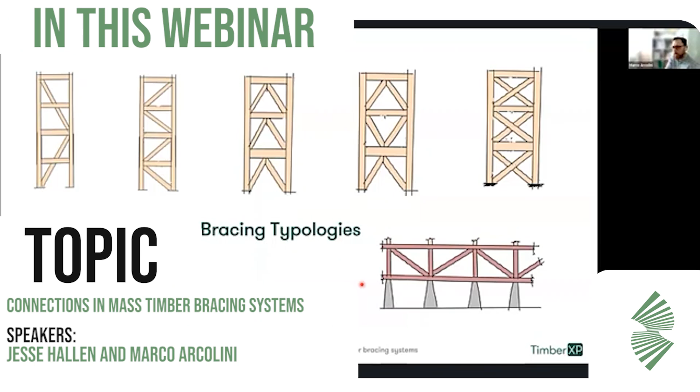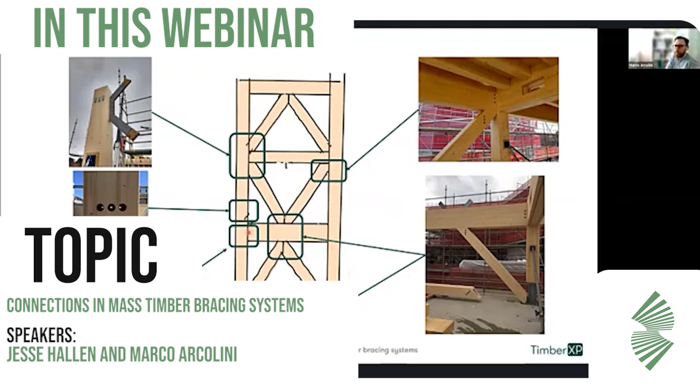Now we can step into the bracing typologies, each of which has its own pros and cons. However, we face issues from the durability and maintenance point of view. For instance, the way the building is stuck on top of the colonnade. For instance, we have the middle point in the beam where the diagonal intersects.

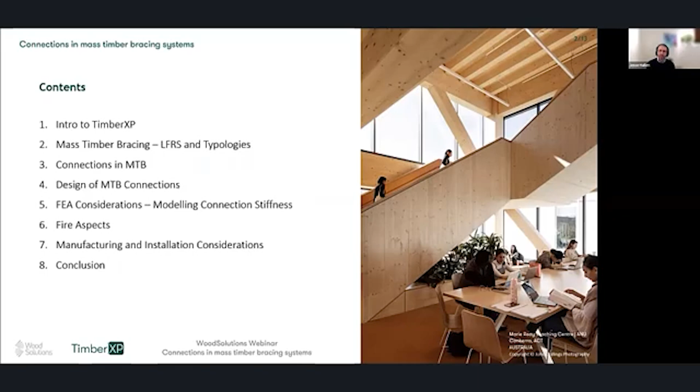So in terms of what we'll cover today, we'll start with a quick intro to our company. I'll then hand over to Marco, who is our principal engineer and bracing and connections guru. So he'll take us through some different mass timber bracing typologies. We'll look at connection details and some design considerations. We'll touch on structural analysis and specifically handling connection stiffness in a finite element model. And we'll close with some comments on holistic design, so considering aspects such as fire, manufacturing, and installation.

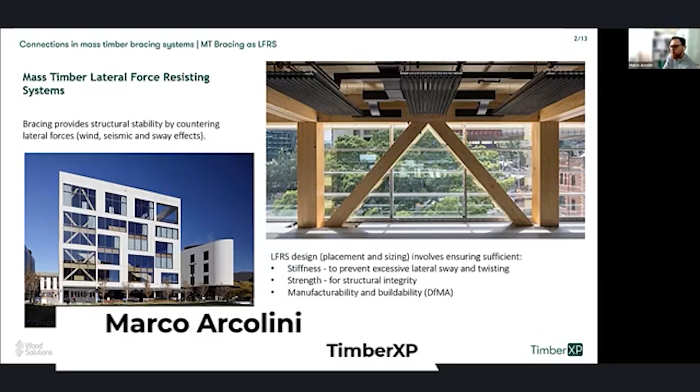Before I start presenting, we appreciate that not everyone in the audience comes from a structural engineering background, so we keep our discussion high level and avoid getting too technical. But let's get started. So bracing systems typically feature lateral force resisting systems that provide structural stability to our buildings. And these kinds of systems react to lateral forces such as wind and seismic.

The placement and sizing of the lateral force resisting system play a crucial role in ensuring stiffness, which is very important in order to prevent excessive lateral sway and twisting of your building, as well as providing the necessary strength for structural integrity. In addition to that, though, by properly designing bracing and connections in mass timber, we can enhance the design for manufacturing and assembly, which is the kind of DFMA approach that we know quite well. So making manufacturing and installation a very smooth and efficient process.

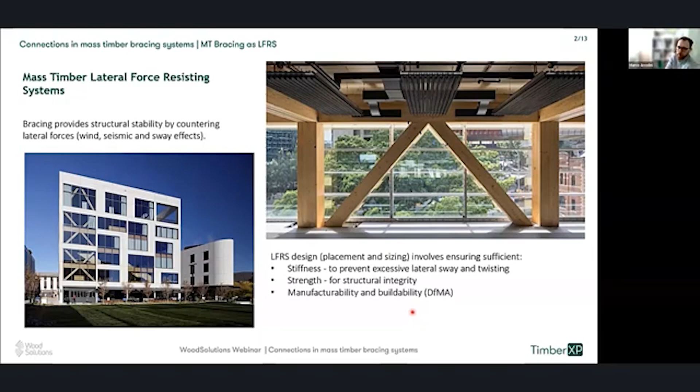But in order to achieve that point, it's crucial, in our opinion, to start from the beginning thinking about the way you want not only to design, but also physically manufacture and erect your building. In this case, the bracing system.

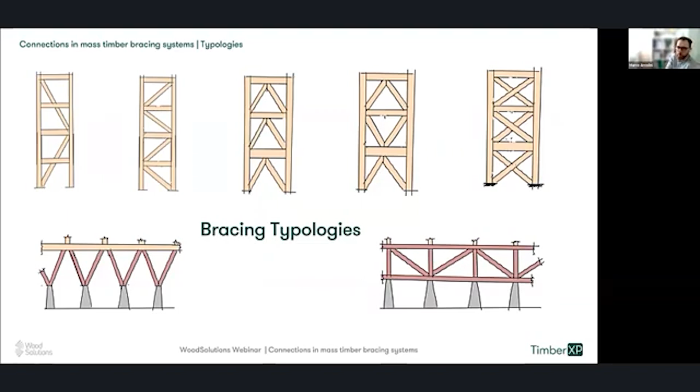Now we can step into the bracing typologies, each of which has its own pros and cons. It's very important because understanding these differences is key for you in order to properly select the bracing system for a specific given project, making sure you can deploy the most efficient solution for your project. In here, for instance, we have several bracing systems applied to specific buildings.

For instance, starting from the left, there is the Bond in North Sydney, which uses a multi-floor bracing system. Its primary advantages are minimal facade impact, fewer elements, and a smaller number of connections that you have to deal with, typically ending up with cost efficiency. However, it faces some limitations in terms of stiffness and strength compared with the other solutions, and might pose some challenges from a prefabrication point of view if it's needed.

The middle one is the International House in Sydney, which features a chevron bracing system, also well known as inverted V-shaped bracing, which offers, of course, high strength and stiffness in this case. But despite these benefits, it might raise some concern in terms of complexity. So compared to the previous one, given the same building size, it essentially ends up with an additional number of elements that we need to manufacture, we need to provide connections for, etc.

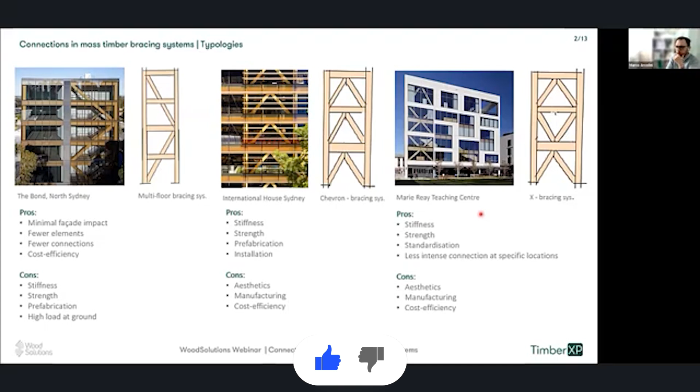Moving to the right one, there is the Marie Reay Teaching Centre back in Canberra, which utilizes an X-bracing system, which is known very well for its stiffness and strength. However, it might raise some potential concerns, including aesthetic. Sometimes we have to deal with architectural expectations or clients' needs, where they don't really want us to put bracing through the glazing of the facade. In addition to that, it might have some issues, as I said before, in terms of manufacturing implications, which of course might impact the cost efficiency of your buildings.

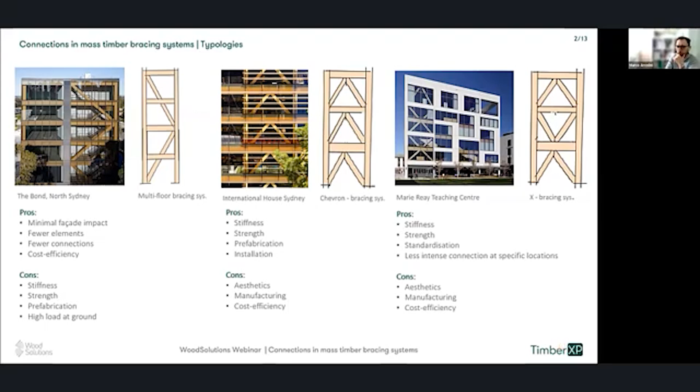Well, finally, we have an example. This is an X-bracing system. The particularity of this one is the location where the bracing intersects, which requires specific attention and solutions in order to make sure we can deal properly with this kind of detail. And the advantage of this system is the great level of stiffness you can achieve, and even the level of prefabrication and standardization that you can achieve.

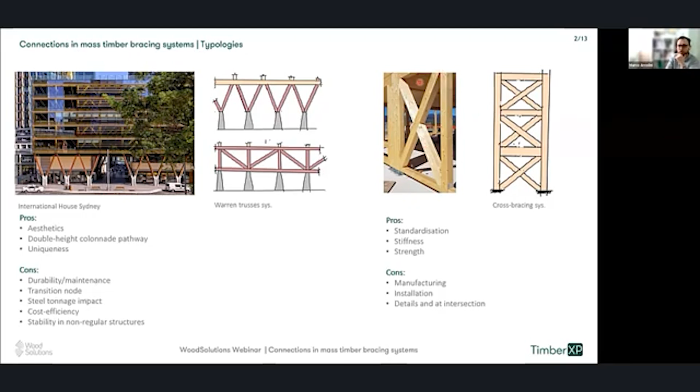Okay, so in terms of connection design, we should probably first ask ourselves what kind of role connections play in timber construction. Well, in my personal opinion, connections are where the magic truly happens. They do much more than just holding elements together; they are the way we can transform individual pieces into a cohesive functional structure. So we can definitely say that connections in bracing systems serve two main purposes. They assemble elements into the design and shape we want to achieve, and they provide the necessary stiffness and strength we need.

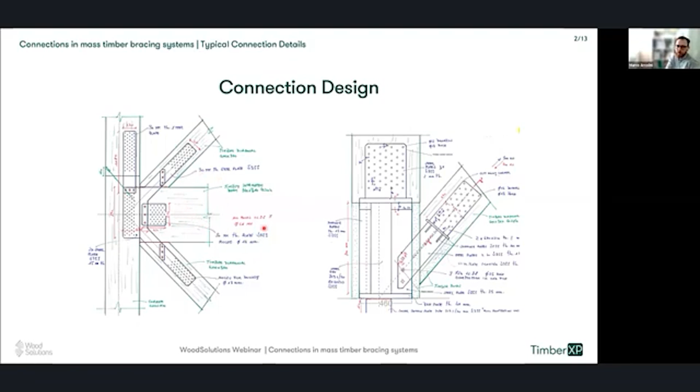Here we can discuss the importance of specific locations and details in mass timber bracing. For instance, we have the middle point in the beam where diagonals intersect, as well as this location where the diagonals approach the corner defined by columns and beams. And as I said, these locations are crucial in terms of the number of elements to connect, and also in terms of the fixings we need to deal with, the way we need to process timber elements in the right way, and making sure everything connects together properly.

Another one, of course very crucial in our opinion, is at the ground level, where the intersection between multiple materials is going to play an important role. So here we have perhaps steel, timber, and concrete connecting and interfacing together. This is a situation where a very holistic and synergistic approach, talking with suppliers, builders and installers, is going to be an important aspect of your design process.

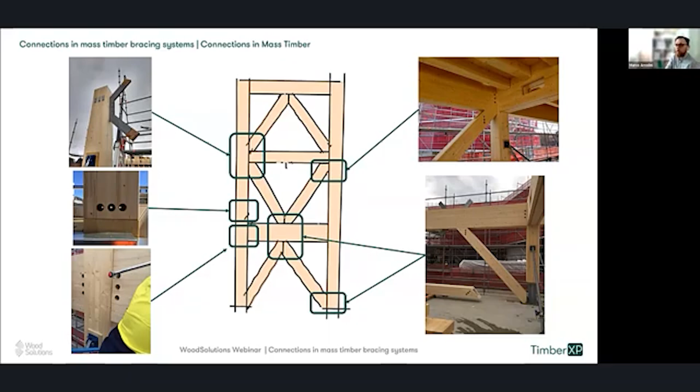Also, looking at the top right image, it reminds me of the importance of properly engaging the bracing system. In fact, in all cases, it's paramount to transfer diaphragm forces from the floor slab back to the bracing in a proper way. And depending on specific situations, we might need to design specific connections for slab to beam, slab to slab, and slab to bracing system. And in that case, sometimes additional steel elements such as straps, chords, and collectors might be necessary in order to enhance the connection intent as well as the transition of loads.